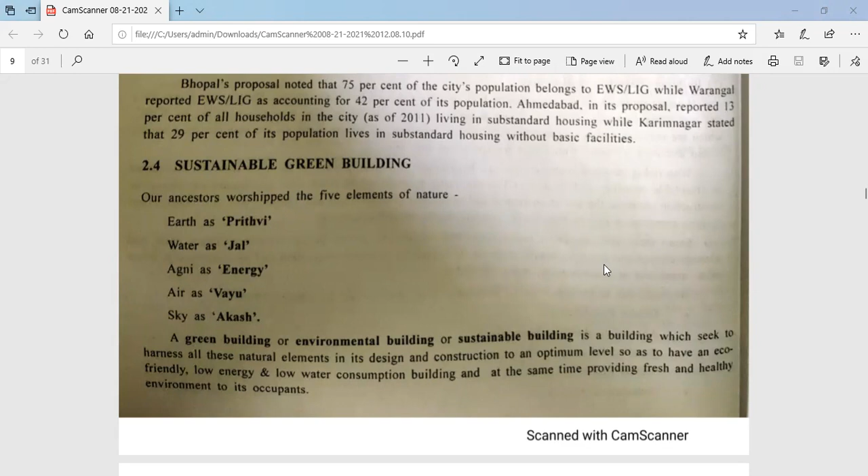natural elements in its design and construction to an optimum level, so as to have an eco-friendly, low energy, and low water consumption building, while at the same time providing a fresh and healthy environment for its occupants.

So the term green building applies not just to products but to building design, orientation, construction strategies, landscaping, operations, maintenance, and more. So the less impact a building has on human health and the environment, the more green it is.

So the concept of green building integrates a variety of strategies during the planning, design, construction, and maintenance of building projects.

So the common goal of green building is achieving aesthetic harmony between a structure and its surrounding environment, and using those resources that help in environmental protection or disturb the environment the least compared to other alternatives available.

So the green building movement is in fact the result of contribution from architects and engineers in maintaining ecological balance, and therefore a step forward by architects and engineers to work as environmentalists.

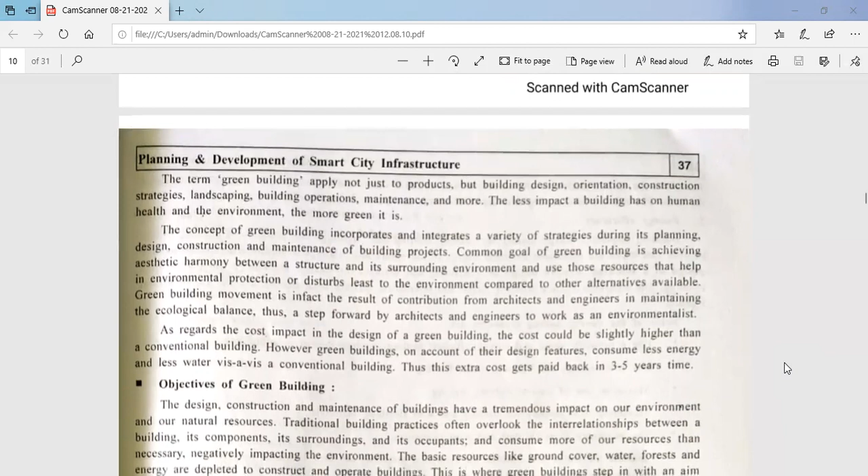So as regards the cost impact of green building design, the cost could be slightly higher than a conventional building. However, the green building, on account of its design features, consumes very less energy and less water than

a conventional building. So this extra cost gets paid back in 3 to 5 years' time.

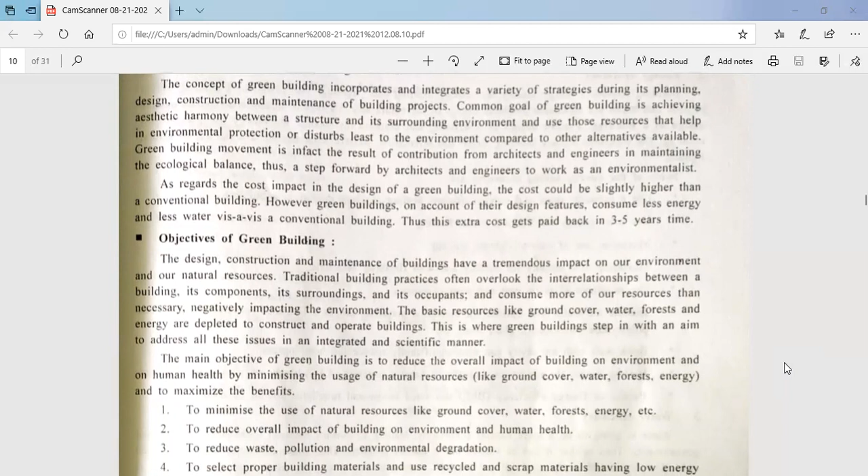So the objectives of green building are that the design, construction, and maintenance of the building have a tremendous impact on our environment and natural resources.

So traditional building practice often overlooks the interrelationships between the building and its components, surroundings, and occupants, and consumes more of our resources than necessary, negatively impacting the environment.

So basic resources like ground cover, water, forest, and energy are depleted to construct and operate buildings.

So this is where green buildings step in, with an aim to address all these issues in an integrated and scientific manner. The main objective of green building is to reduce the overall impact of the building on the environment and

on human health, by minimizing the use of natural resources like ground cover, water, forest, energy, and to maximize the benefits. So first one is

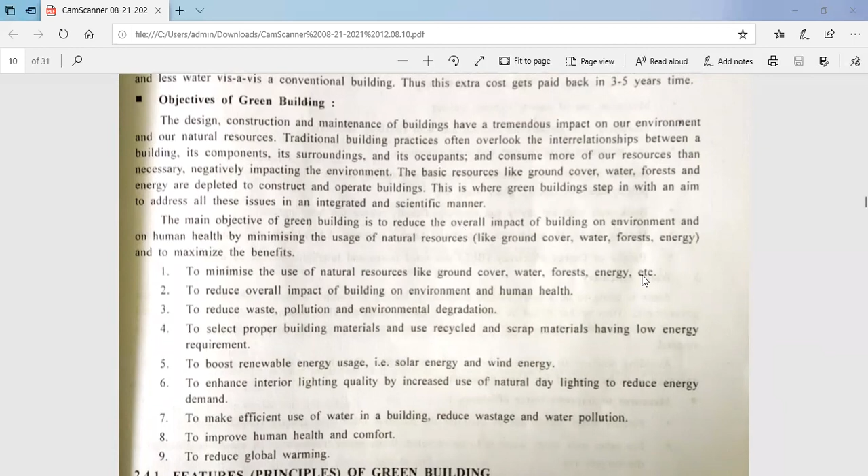to minimize the use of natural resources like ground cover, water, forest, energy, etc. The second is to reduce the overall impact of the building on environment and human health.

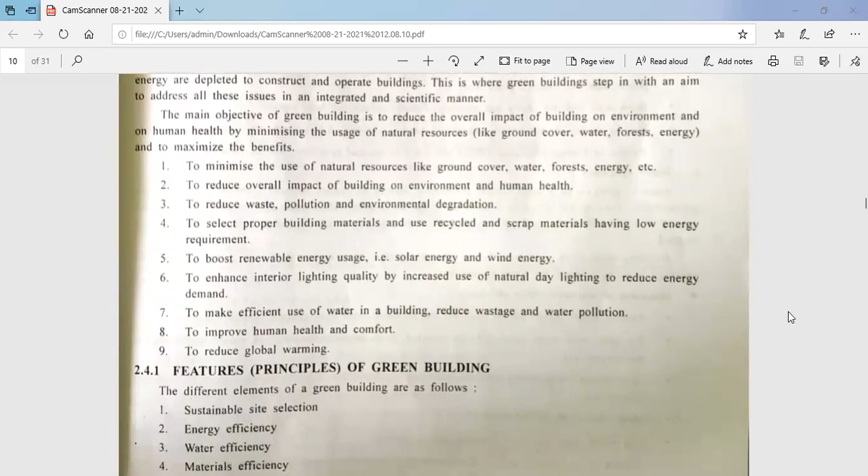To reduce waste, pollution, and environmental degradation. To select proper building materials and use recycled and scrap materials having a low energy requirement.

To boost renewable energy use like solar energy and wind energy. To enhance interior lighting quality by increased use of natural daylighting.

To reduce the energy demand, to make efficient use of water in a building, reduce wastage and water pollution, to improve human health and comfort, and to reduce global warming.

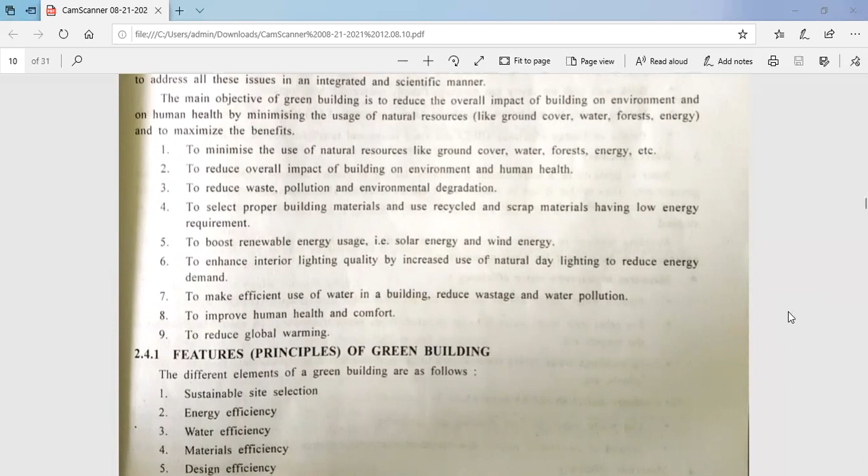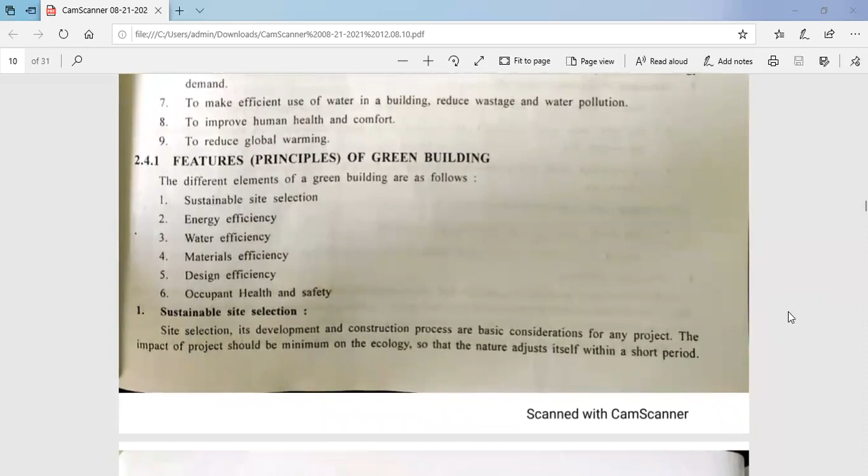So the different elements of a building are as follows - these are the principles of green buildings: sustainable site selection, energy efficiency, water efficiency, material efficiency, design efficiency, and occupant health and safety.

So talking about sustainable site selection - site selection, development, and the construction process are the basic considerations for any project.

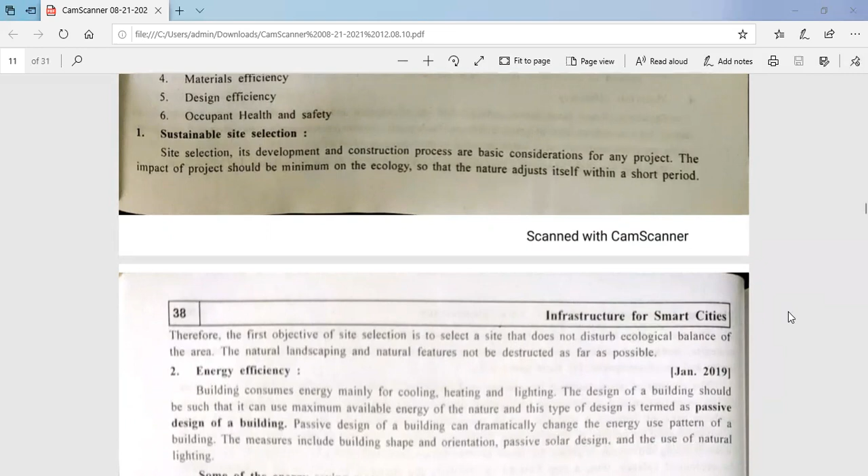So the impact of the project should be minimum on the ecology, so that nature adjusts within a short period itself. Therefore, the first objective of site selection is to select a site that does not disturb the ecological balance of

the area, so that natural landscaping and natural features are not disturbed as far as possible.

Now second is energy efficiency. Buildings consume energy mainly for cooling, heating, and lighting. So the design of a building should be such that it can use the maximum available energy of nature, and this type of design is known as passive design of a building.

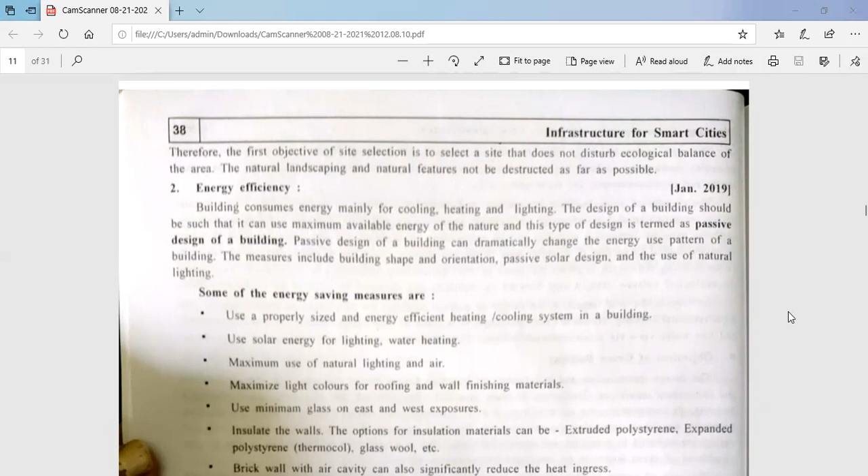So this passive design of a building can dramatically change the energy use pattern of a building. The measures include building shape and orientation, passive solar design, and the use of natural lighting.

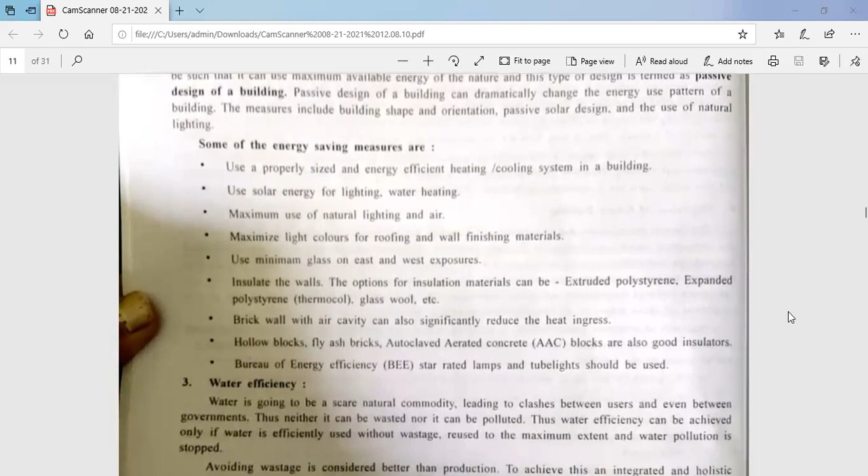So some of the energy saving measures are: use a properly sized and energy efficient heating or cooling system in a building, use solar energy for lighting and water heating, maximize the use of natural lighting and air, use light colors

for roofing and wall finish materials, use minimum glass on east and west exposures, and insulate the walls.

The options for insulation materials can be extruded polystyrene, expanded polystyrene, glass wool, etc.

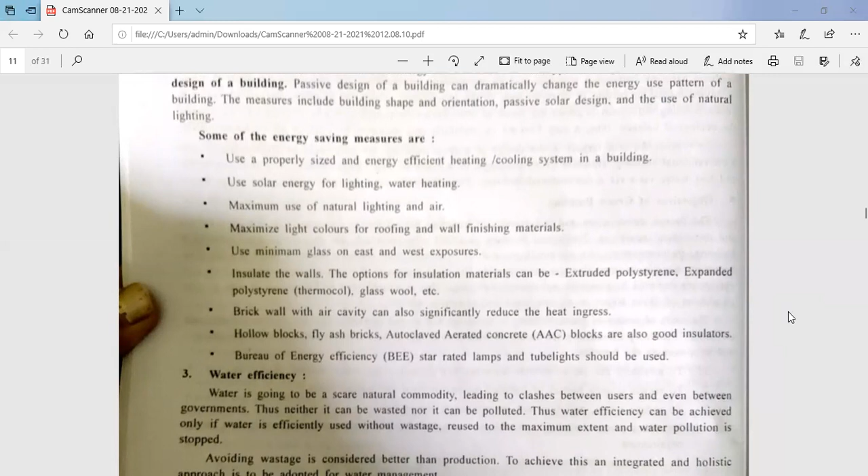Brick wall with air cavity can also significantly reduce heat ingress. Hollow blocks, fly ash bricks, and autoclaved aerated concrete blocks are also good insulators.

The Bureau of Energy Efficiency (BEE) star rated lamps and tube lights should be used. Third one is water efficiency.

So water is going to be a scarce natural commodity, leading to clashes between users and even between governments. Thus, it can neither be wasted nor polluted.

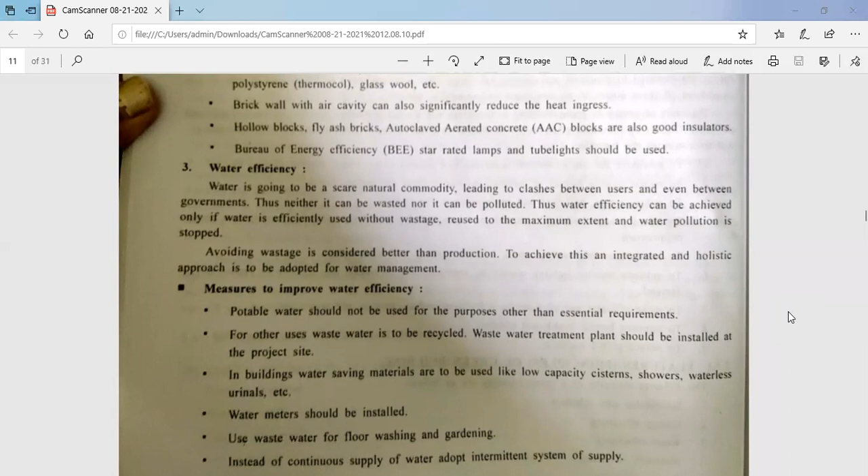So water efficiency can be achieved only if water is efficiently used without wastage, reused to the maximum extent, and water pollution is stopped. So avoiding wastage is considered better than production, and to achieve this, an integrated and holistic approach is to be adopted for water management.

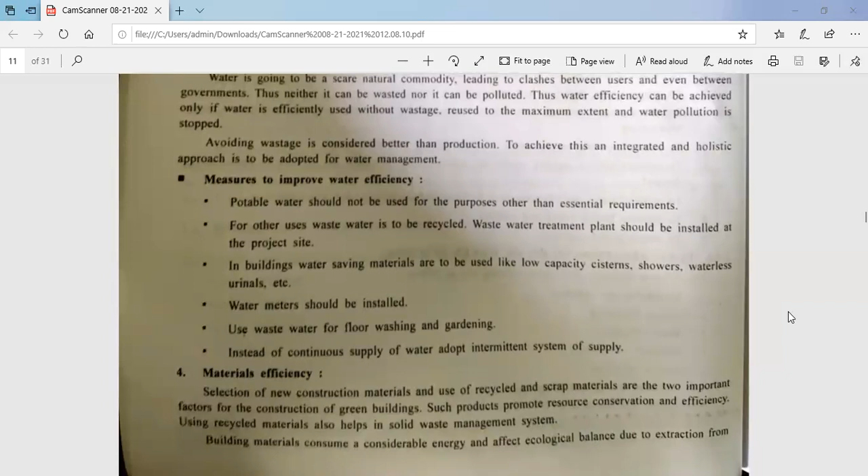The measures to improve water efficiency are: potable water should not be used for purposes other than essential requirements. For other uses, wastewater should be recycled. Wastewater treatment plants should be installed at the project site. Water saving materials are to be used in buildings, like low capacity cisterns, showers, waterless urinals, etc. Water meters should be installed. Use wastewater for floor washing and gardening instead of continuous supply of water. Adopt an intermittent system of supply.

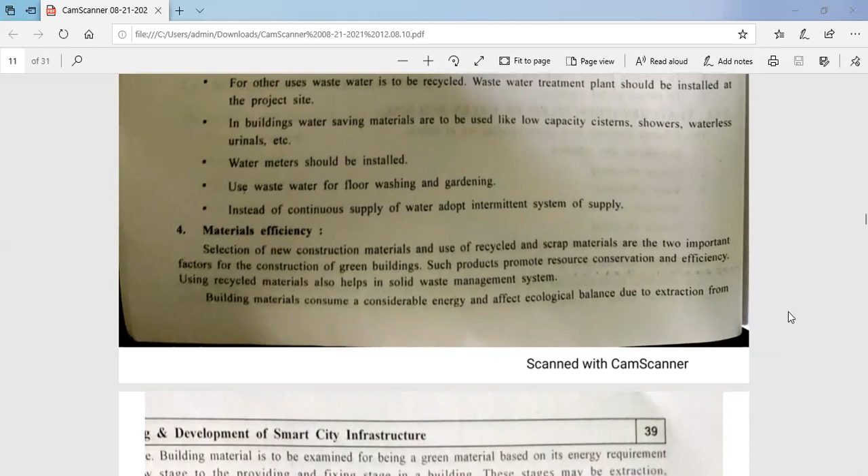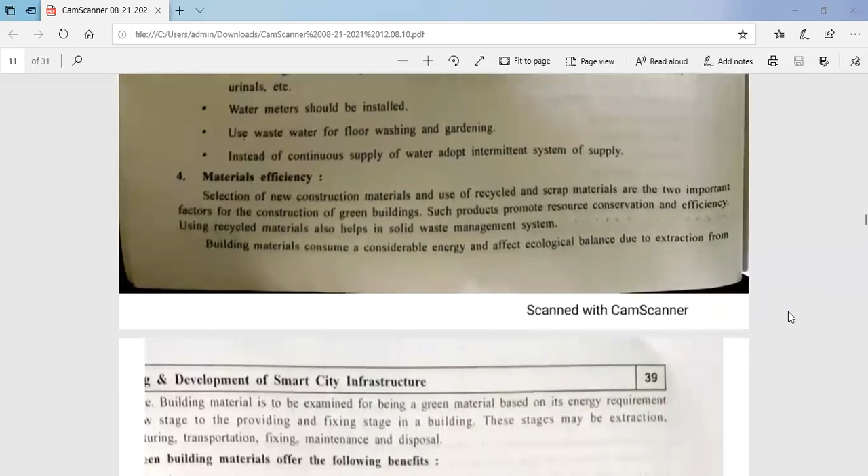Next is materials efficiency. Selection of new construction materials and the use of recycled and scrap materials are the two important factors for the construction of a green building. Such products promote resource conservation and efficiency. Using recycled materials also helps in solid waste management. Building materials consume considerable energy and affect ecological balance due to extraction.

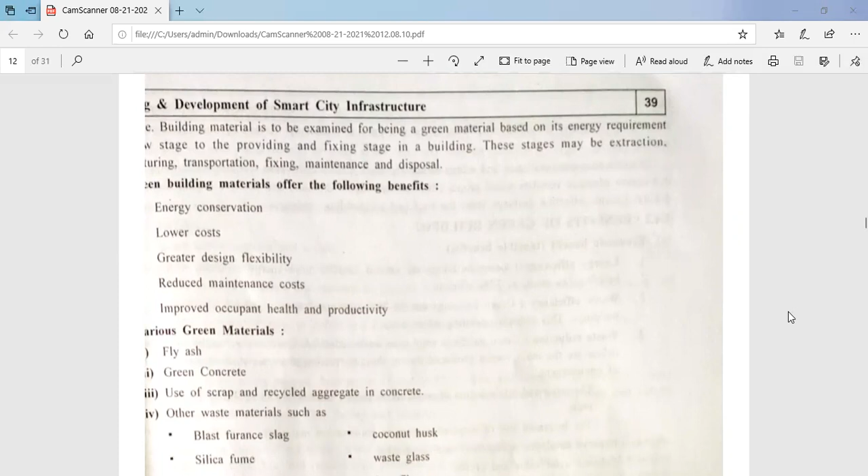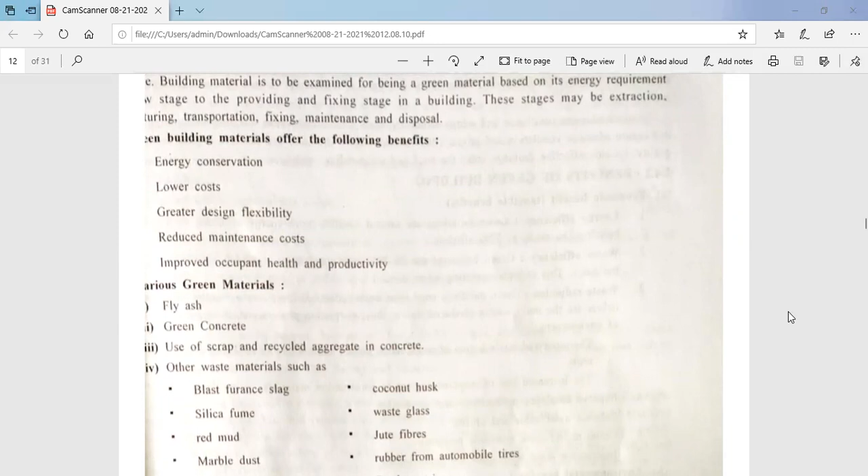The building materials are to be examined for being a green material based on the energy requirement, at the providing and fixing stage in a building. These stages may be extraction, transportation, fixing, maintenance, and disposal. Green building materials offer the following benefits: energy conservation, lower cost, greater design flexibility, reduced maintenance cost, and improved occupant health and productivity.

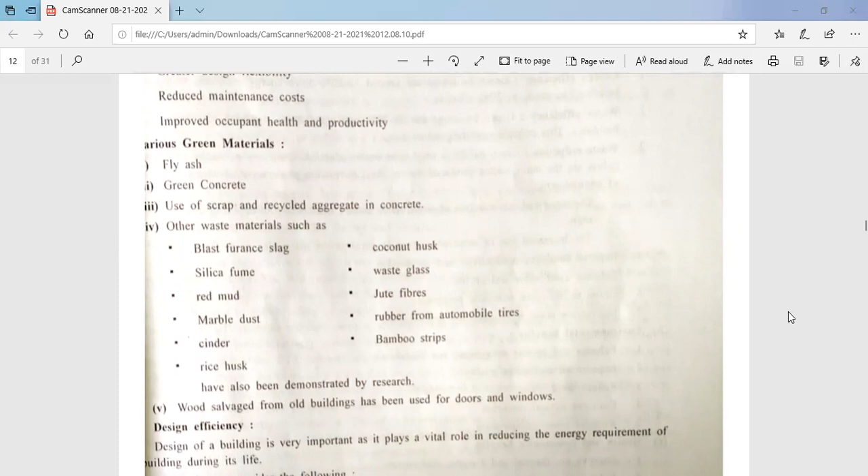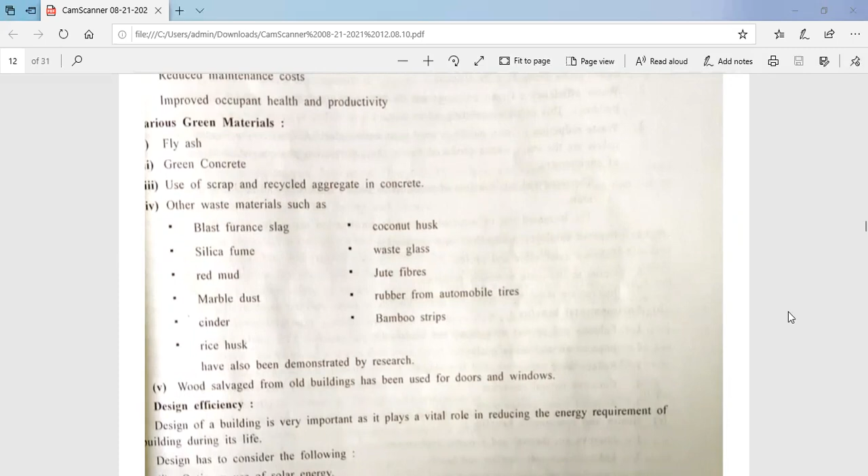There are various green materials here, which are fly ash, green concrete, use of scrap and recycled aggregate in concrete, other waste materials such as blast furnace slag, coconut husk, silica fume, waste glass, red mud, jute fibers, marble dust, rubber from automobile tires, cinder, bamboo strips, rice husks have also been demonstrated by research. Wood salvaged from old buildings has been used for doors and windows.

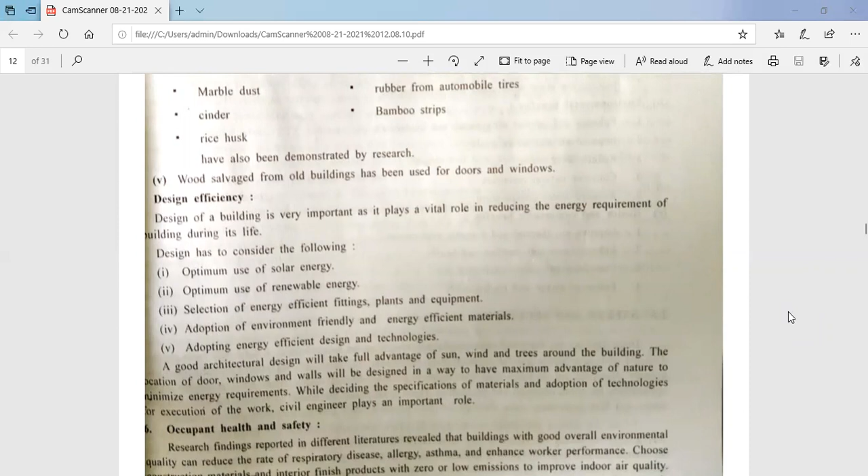Next one is design efficiency. The design of a building is very important and plays a vital role in reducing the energy requirement of a building during its life. So the design has to consider the following: optimum use of solar energy, optimum use of renewable energy, selection of energy efficient fittings, plants and equipment, adoption of environment friendly and energy efficient materials, and adopting energy efficient designs and technologies.

A good architectural design will take full advantage of sun, wind and trees around the building. The location of doors, windows and walls will be designed in a way to have maximum advantage of nature and minimize energy requirements. While deciding the specification of materials and adoption of technologies for execution of work, the civil engineer plays an important role.

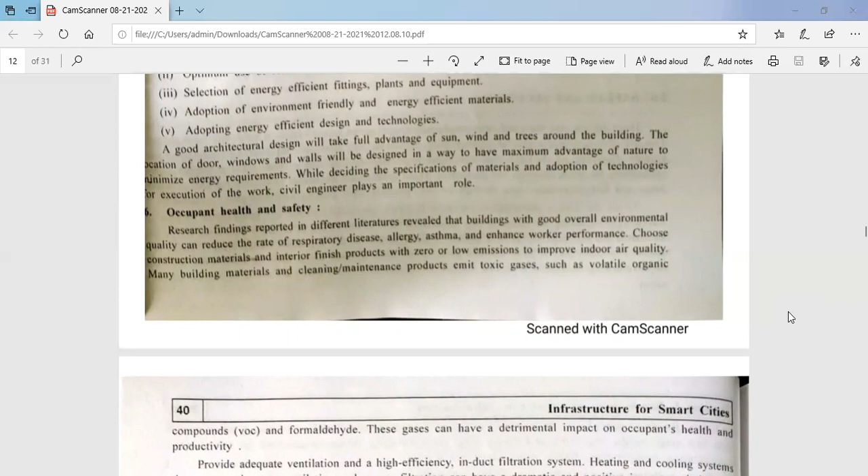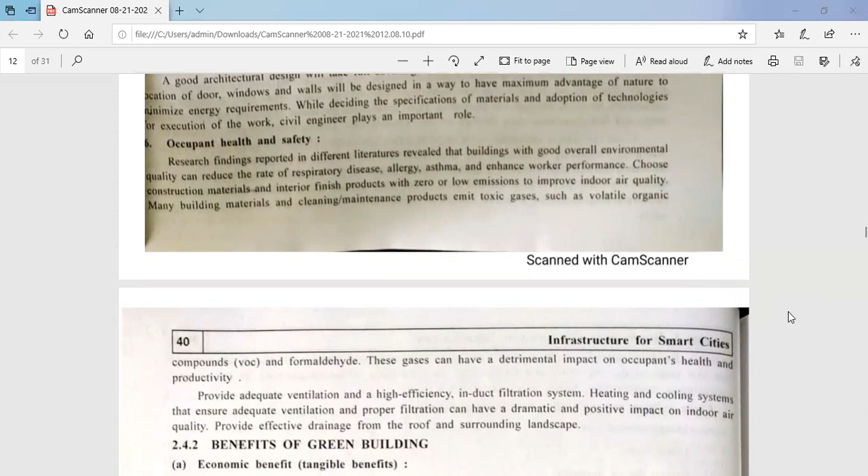The next one is occupant health and safety. Research findings reported in different literature reveal that buildings with good overall environmental quality can reduce the rate of respiratory disease, allergy, asthma, and enhance workers' performance. So choose construction materials and interior finished products with zero or low emission to improve indoor air quality.

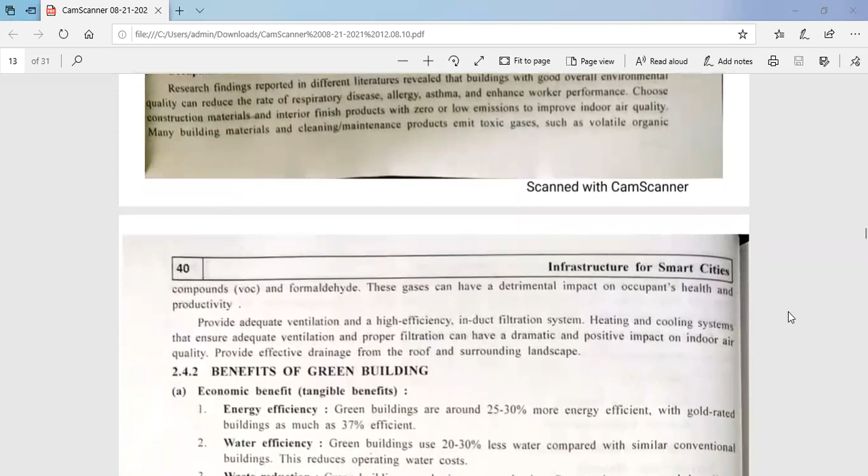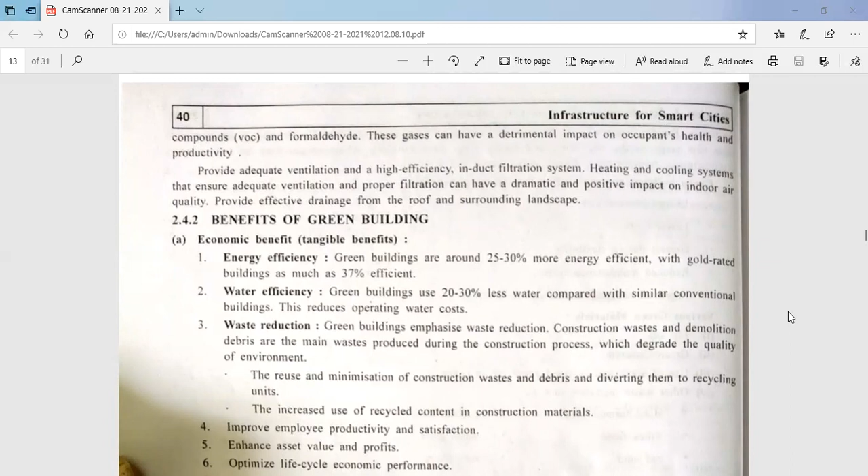Many building materials and cleaning maintenance products emit toxic gases such as volatile organic compounds and formaldehyde, which can have a detrimental impact on occupants' health and productivity. So provide adequate ventilation and a high efficiency in-duct filtration system. Heating and cooling systems that ensure adequate ventilation and proper filtration can have a dramatic and positive impact on indoor air quality, which also provides effective drainage from the roof and the surrounding landscape.

So benefits of green buildings are: first, the economic benefit, which is energy efficiency. Green buildings are around 25 to 30% more energy efficient, with gold rated buildings as much as 37% efficient. Second is water efficiency. Green buildings use 20 to 30% less water compared to similar conventional buildings. This reduces operating water cost.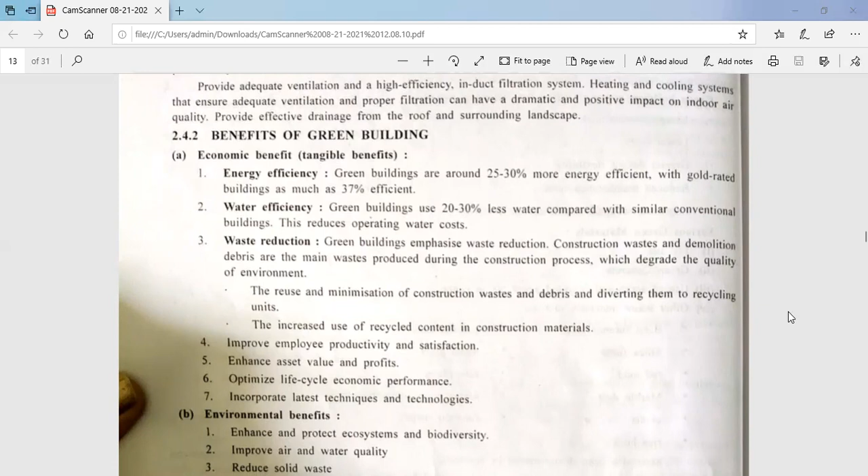Third is waste reduction. Green buildings emphasize waste reduction. Construction waste and demolition debris are the main waste produced during construction that degrades environmental quality. The reuse and minimization of construction waste and debris, and diverting them to recycling units, and the increased use of recycled content in construction materials improve employee productivity and satisfaction, enhance asset value and profits, optimize life cycle economic performance, and incorporate the latest technology and techniques.

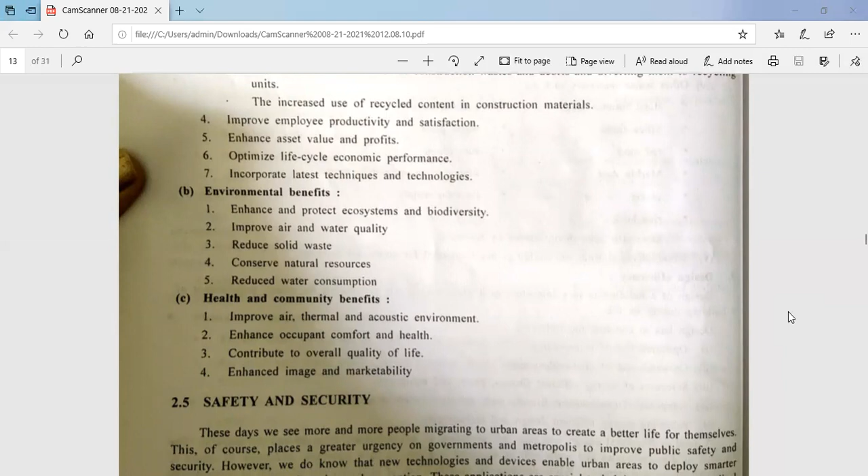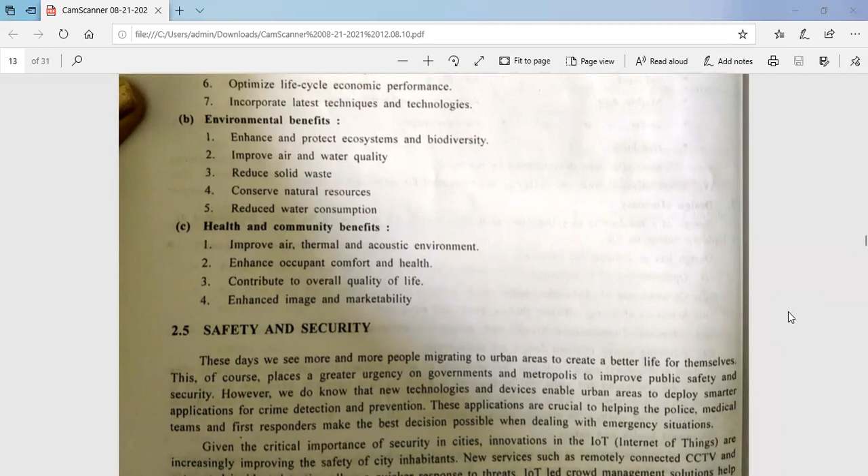Second is environmental benefits, which include enhancing and protecting ecosystems and biodiversity, improving air and water quality, reducing solid waste, conserving natural resources, and reducing water consumption. Next is health and community benefits, which include improving air, thermal and acoustic environment, enhancing occupant comfort and health, contributing to overall quality of life, and enhancing image and marketability.

So the next topic is safety and security. These days we see more and more people migrating to urban areas to create a better life for themselves. This places a greater urgency on governments and metropolises to improve public safety and security. New technologies and devices enable urban areas to deploy smarter applications for crime detection and prevention. These applications are crucial to helping the police, medical teams, and first responders make the best decision possible when dealing with emergency situations.

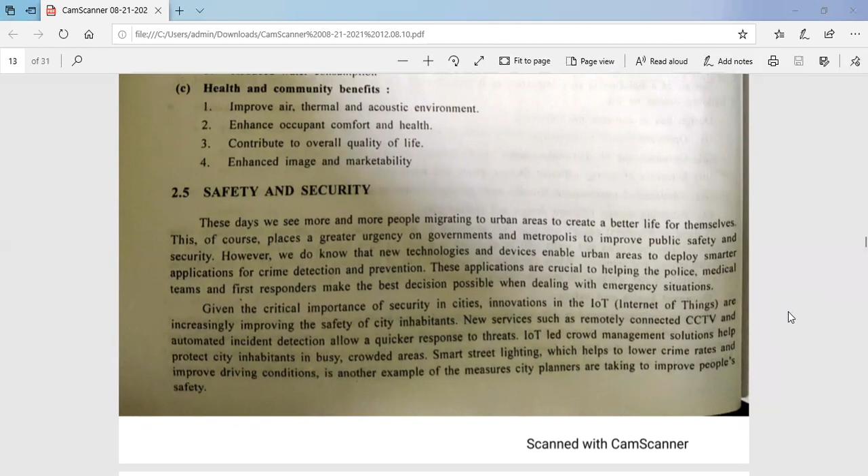Given the critical importance of security in cities, innovations in IoT are increasingly improving the safety of city inhabitants. New services such as remotely connected CCTV and automated incident detection allow a quicker response to threats.

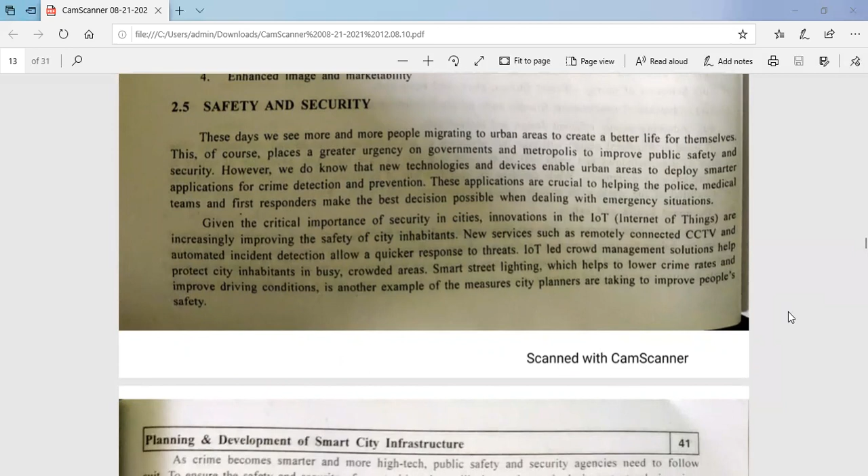IoT-led crowd management solutions help to protect city inhabitants in busy, crowded areas. Smart street lighting, which helps to lower crime rates and improve driving conditions, is another example of measures city planners are taking to improve people's safety.

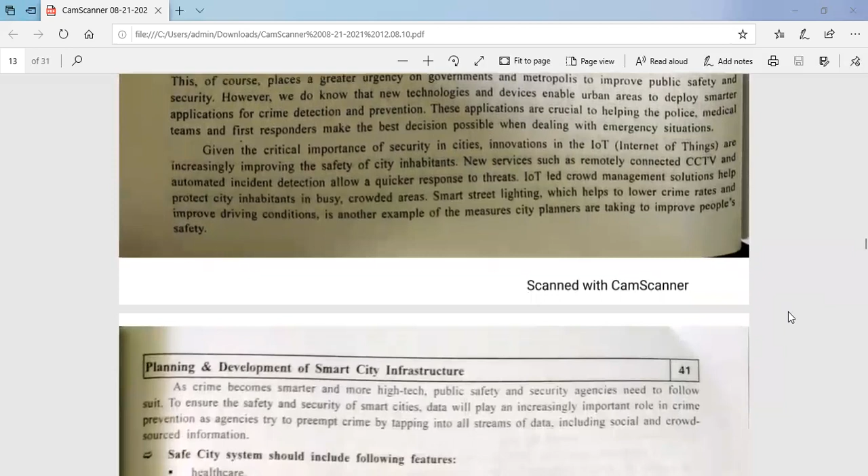As crime becomes smarter and more high tech, the public safety and security agencies need to follow suit. To ensure the safety and security of smart cities, data will play an increasingly important role in crime prevention as agencies try to preempt crime by tapping into all the streams of data, including social and crowdsourced information.

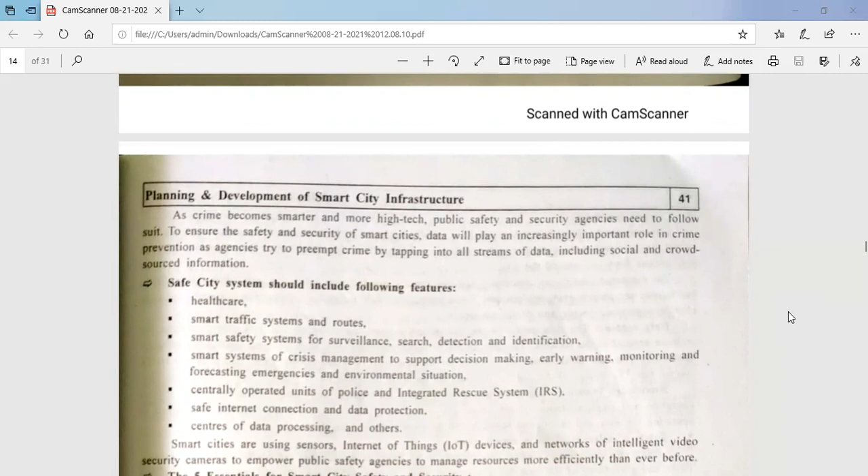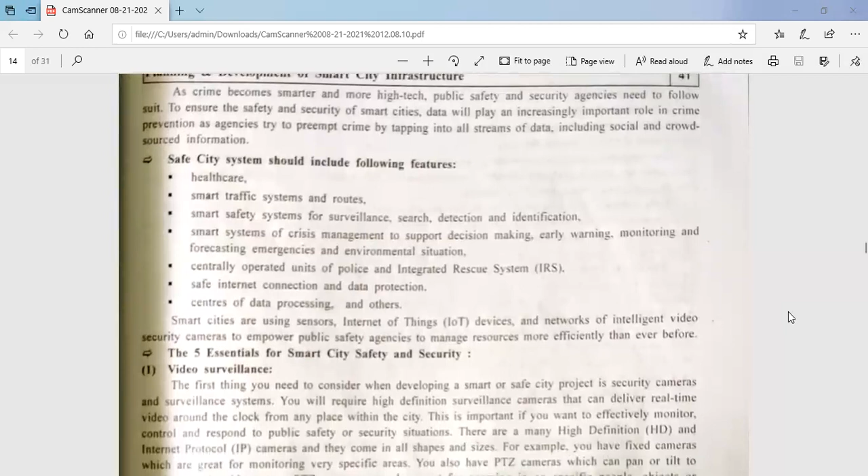The safe city system should include the following features: healthcare, smart traffic systems and routes, smart safety system for surveillance, search, detection and identification, smart system of crisis management to support decision making, early warning, monitoring and forecasting, emergencies and environmental situation, centrally operated unit of police, integrated rescue system, safe internet connection and data protection, centers of data processing and others.

Smart cities are using sensors, Internet of Things devices, and networks of intelligent video security cameras to empower public safety agencies to manage resources more efficiently than ever before.

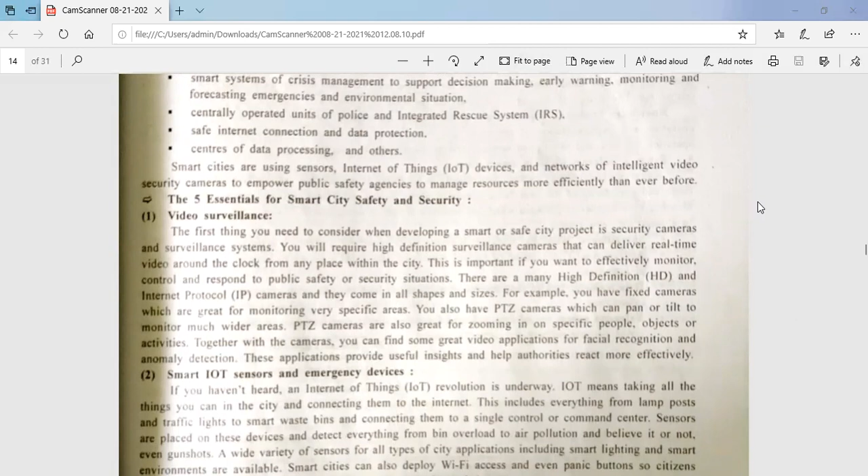So the top five essentials for smart city safety and security.

First one is video surveillance. The first thing you need to consider when developing a smart or safe city project is security cameras and surveillance systems. You will require high definition surveillance cameras that can deliver real time video around the clock from any place within the city. This is important if you want to effectively monitor, control, and respond to public safety or security situations.

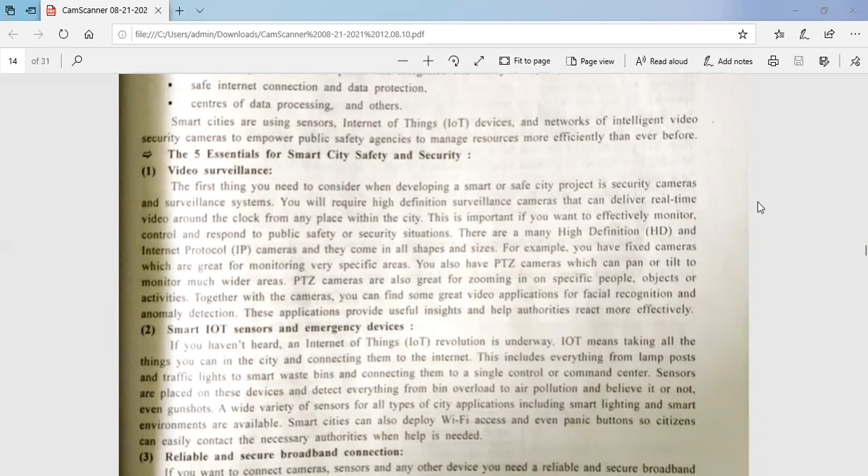There are many high definition and internet protocol cameras, and they come in all shapes and sizes. For example, you have fixed cameras which are great for monitoring very specific areas. You also have PTZ cameras which can pan or tilt to monitor much wider areas, and are great for zooming in on specific people, objects, or activity. Together with the cameras, you can find great video applications for facial recognition and anomaly detection. These applications provide useful insight and help authorities react more effectively.

Second one is smart IoT sensors and emergency devices. If you haven't heard, an Internet of Things revolution is underway. IoT means taking all the things you can in the city and connecting them to the internet. This includes everything from the lamp post to the traffic lights to smart waste bins, and connecting them to a single control or command center.

Sensors are placed on these devices and detect everything from bin overload to air pollution, and believe it or not, even gunshots. A wide variety of sensors for all types of city applications, including smart lighting and smart environments, are available. Smart cities can also deploy Wi-Fi access and even panic buttons so citizens can easily contact the necessary authorities when help is needed.

Third one is reliable and secure broadband connection. If you want to connect cameras, sensors, and other services, you need a reliable and secure broadband connection. This is important, especially for bandwidth demanding applications such as video surveillance. If your connection is poor, the slightest hiccup in your video transmission could ruin the quality of your visual data.

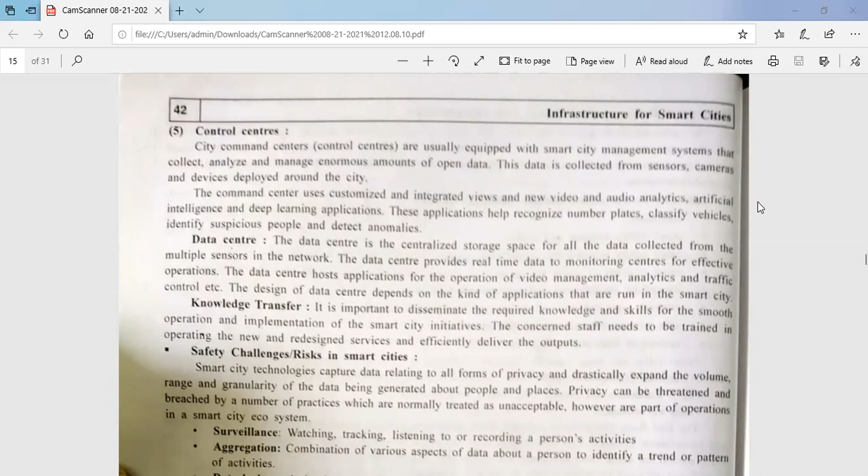Next is knowledge transfer. It is important to disseminate the required knowledge and skills for the smooth operation and implementation of the smart city initiative. The concerned staff needs to be trained in operating the new and redesigned services and efficiently deliver the outputs.